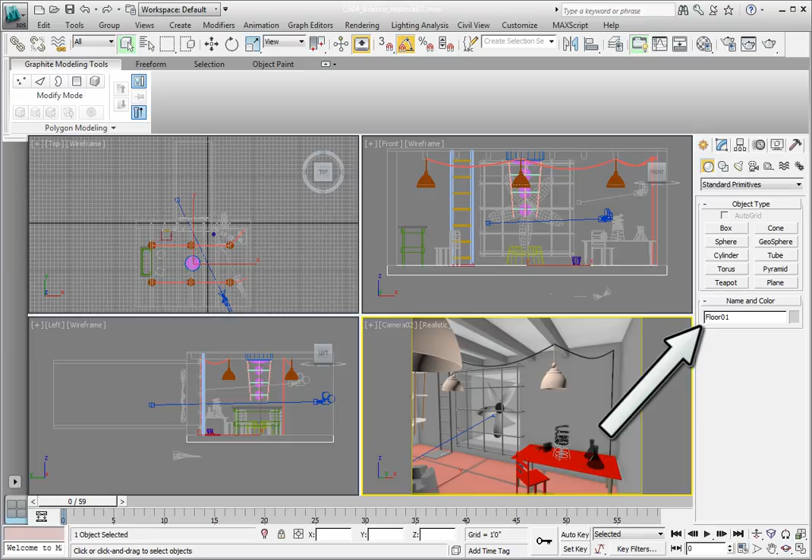If you have the material editor still open, let's close it. That will also close the enlarged preview sample window. First, let's select the floor object. It's easiest to do that in the camera view. The object is called Floor 01. You can also select the object with the Select by Name tool if you're having a hard time picking it in the camera viewport.

In order to resize the pattern, we need to project mapping coordinates using the UVW map modifier. To do this, we have the object selected. We navigate to the command panel and click on the Modify panel. In the modifier list, look down the list. You may have to scroll the window down a little bit. Look for the UVW map modifier. It just says UVW map. Make sure you click on that particular modifier.

In the viewports, you'll notice nothing happens to our pattern because by default, and we can see this with the orange gizmo in the wireframe viewports, this floor is getting the 4x4 texture map projected across the entire floor. If we look at the modifier parameters, we'll notice that there are parameters for quite a few options. Currently, the modifier is projecting the pattern using the planar option. It is projecting it directly down onto the floor. And the projection is fitting to the floor plus just a little bit more, in this case just about 1/4 of an inch. Here is where we enter the size of the area to be covered by the current map.

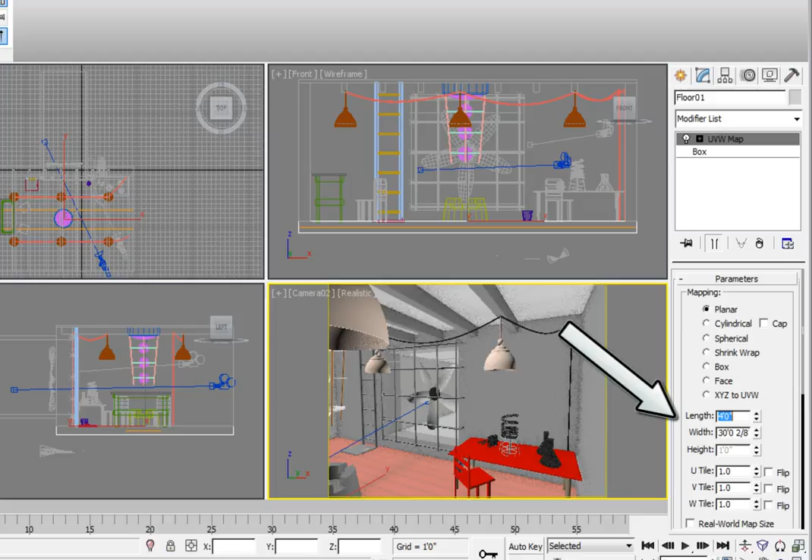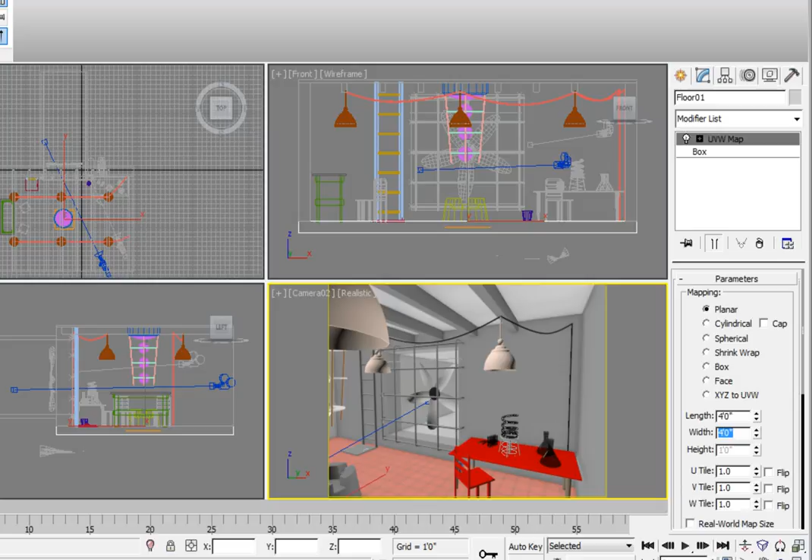What we determined is that the map is occupying 4 feet by 4 feet. Let's highlight the length, then type in 4 and press enter on the keyboard. Then highlight the width, type in 4. Remember to press enter on the keyboard to accept the new value. That now projects the pattern in an area 4 feet by 4 feet. We can see in the top viewport that the gizmo of the UVW map modifier is occupying a 4 foot by 4 foot area. Right-click to make sure the Camera 02 viewport is active. Go to the main toolbar and click the Render button. We'll see that our floor tiles are now correctly sized.

We've analyzed the map, we've determined the area the map will cover, and we then apply a UVW map modifier to the object that gets the map. Then we enter the size of the area to be covered in the UVW map modifier. From experience, this works every time. It's a very simple process and a very important step to getting your maps looking correct. Once the scene finishes rendering, we're going to make one more change to our material to make it a little more convincing. Right now it looks like a shiny linoleum surface.

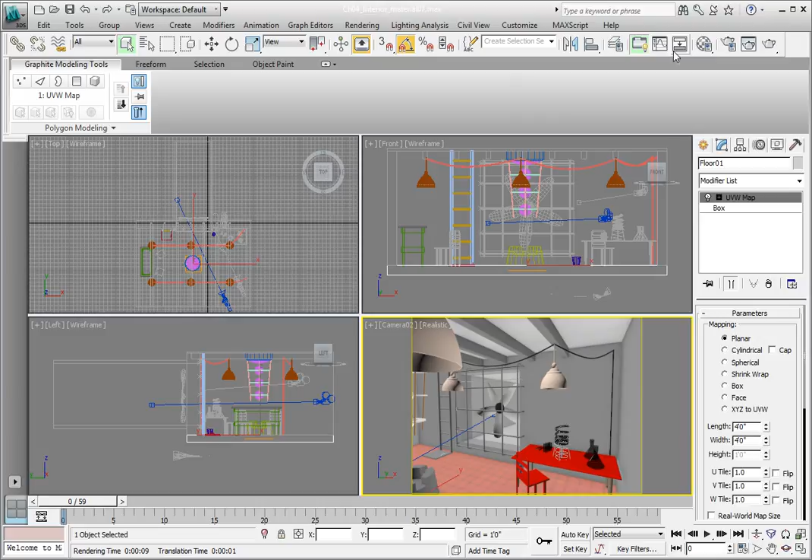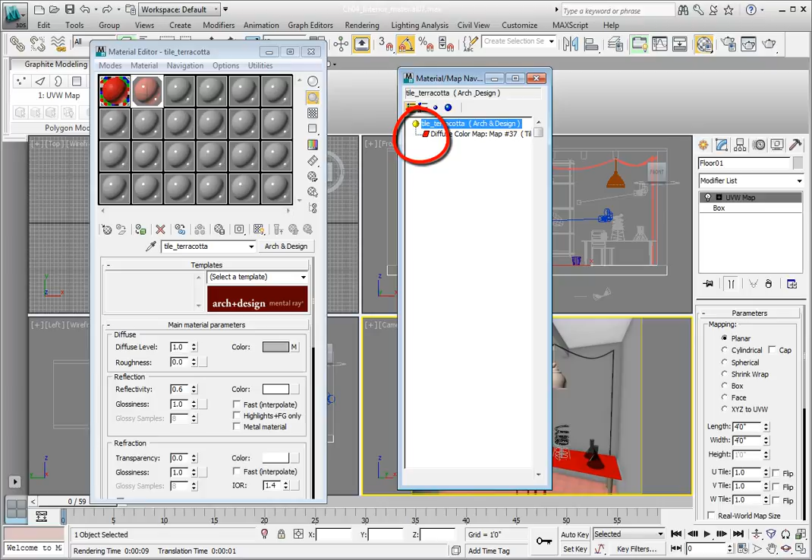Close the render window. Open the compact material editor again. There is a tool that we will use called the Material Map Navigator. To access it, click on the Material Map Navigator icon on the side toolbar of the Material Editor sample slots area. We'll use the navigator to return to the top level of the terracotta material. Click on the very top level, which is the little circle. The parallelogram represents the maps, and the circles represent the materials. A good thing to remember. It can save a little confusion as you're working with materials and maps down the road.

We're going to take the diffuse color map and use it as the bump map as well. We'll right-click on the letter M to the right of the color swatch in the diffuse area. From the right-click menu, select Copy to copy the map. Now, in order to put it in the Bump Maps channel, we need to scroll the window down to the Special Purpose Maps rollout. If that rollout isn't open, go ahead and click the plus on the left-hand side to open it. We want to right-click on the None button to the right of the Bump channel and paste a copy of the map into that channel.

The reason we make a copy is because we're going to need to change the colors in the tile parameters to make the bump work a little better. Remember, bump maps work best off of black and white or grayscale color values. Use the Material Map Navigator to click on the bump map level. In the Tiles Advanced Controls rollout, click on the Tiles Setup color swatch. This is for the tiles. We'll make this pure white to create a bump up,

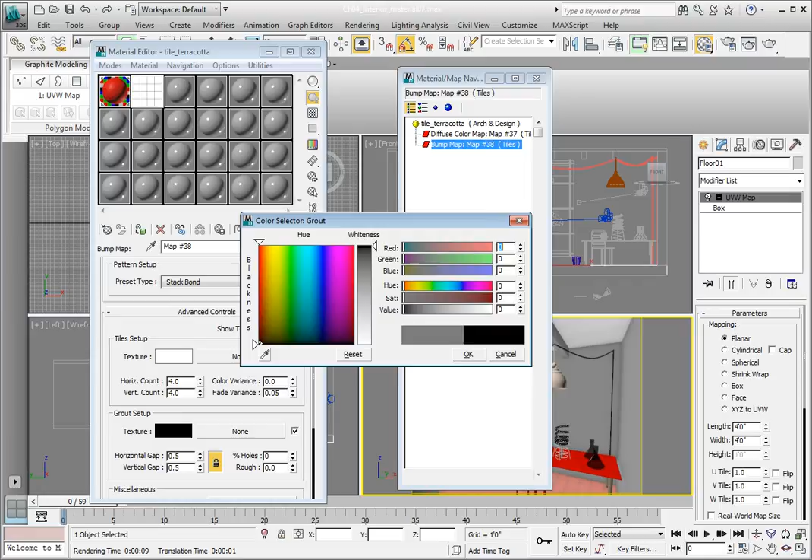and we'll double click on the color swatch for the grout and make this pure black to make it not do anything. Just remember, bump maps work off of grayscale information. Click OK to close the color selection dialog. In the bump amount value, type in 0.5 and press enter. Click the render button from the main toolbar.

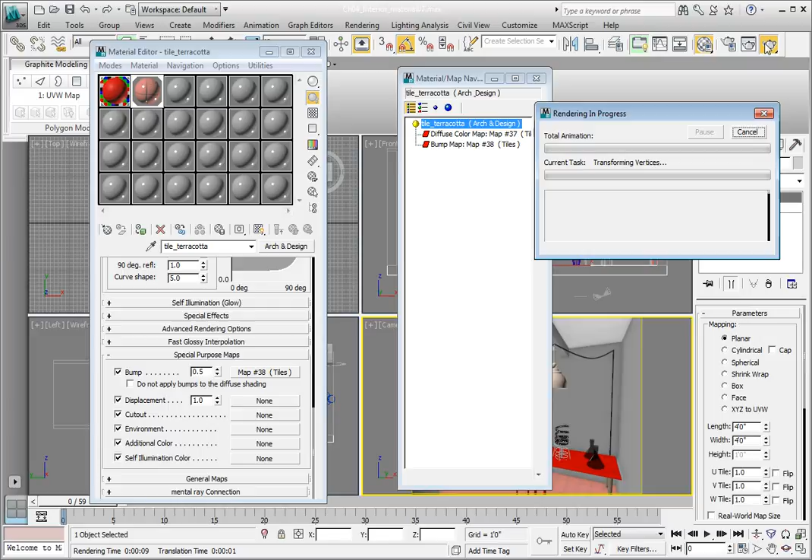Once the rendering completes, you should see a little bit of a bump texture on the tiles themselves. It may not be something very noticeable in this particular example because of our lighting and the floor itself, but it will appear to raise the tiles up a little bit above the grout in the rendering of the scene. And you can see that start to develop in the final rendered image.

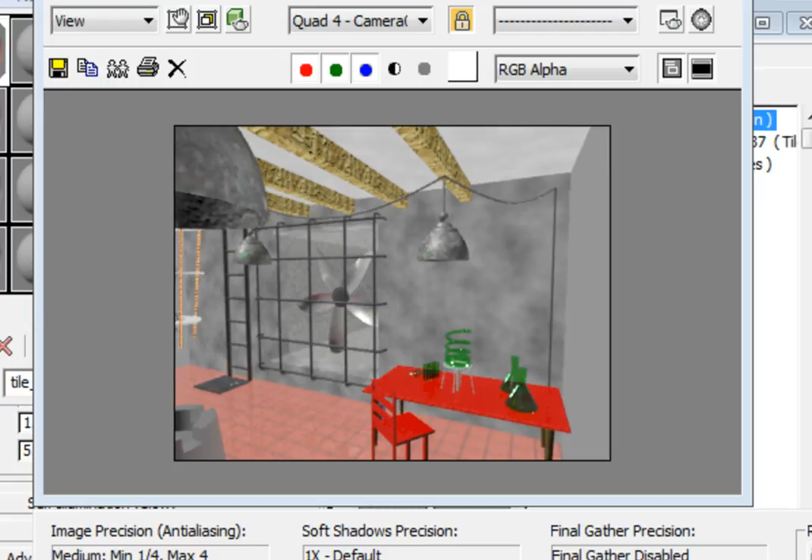So we copied the color information of our tiles into the bump channel. Then we changed the color of the tiles map to black and white, keeping in mind that white will bump up and black doesn't do anything. You'll see this is fairly simple, and it really doesn't have to be a confusing process at all. Press Ctrl+S to save the file.